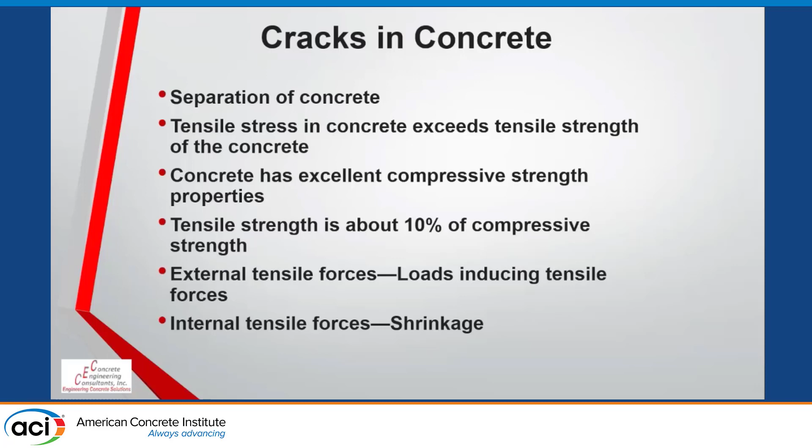I want to make sure I'm clear on this. You can have a concrete slab. You can have a concrete element that has no loading. You still can get cracks. There are lots of reasons for concrete to crack.

Next thing I want to talk about is cracks. These are all the descriptions we have of concrete cracks. Now, the one that I really like is that, typically, if you go to the crack, you can stick your hand down in the crack, not touch the side.

The other side of that is if you come on that same project and the engineer looks at it, and you can barely see it. You sit down and brush it off, take a little light. You know, these terms get kind of changed.

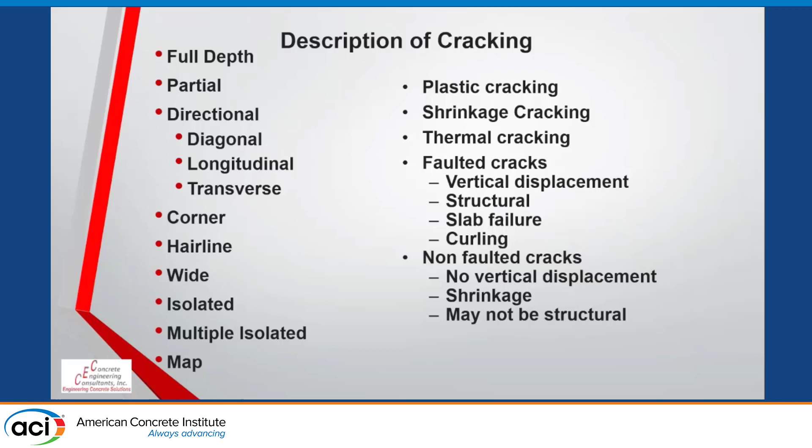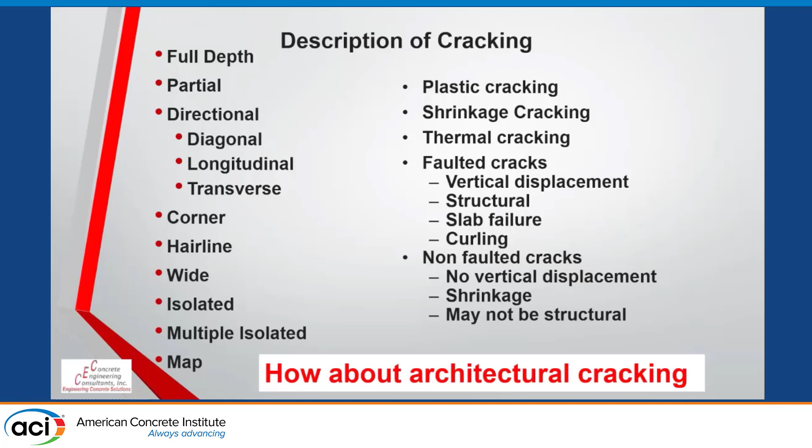But the thing I want to introduce you to is an architectural crack. The next time you go on a project and have a crack, and somebody's talking about it, what are you going to tell them? Hey, this is an architectural crack. It gives the structure some character. And if you look here, it looks perfect, but we did install several architectural cracks in the concrete so that we get the appropriate look.

These carry the loads and other things. You can use pre-stressed concrete. Okay, you can use pre-stressed concrete, but if you use pre-tensioned, pre-cast concrete, you can put those elements together. Many times, you let it crack where it needs to crack.

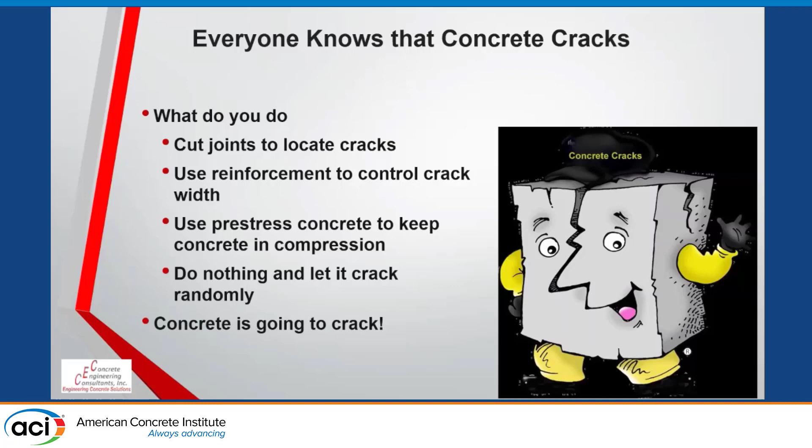Now, looking at design, managing cracks, looking at the construction process, I kind of look at this as a three-legged approach. Everybody's going to do their part. In practice, you need everybody doing their part. So the design is a big thing.

This slab on metal deck. I mean, it's a bit involved with slab on metal. How many people see a cracked slab on metal? Okay. I could never see that, but part of it, you need to look at what this is going to be. So you design this in accordance with the owner's desires and codes.

Should the engineer discuss cracks with the owner? Should he talk about the potential for cracks? Should he talk about the width of cracking, where they may be? And then you need to build that. The engineer's doing his job. That's the owner's expectations. He's designing the level of cracking. And then you need to build it.

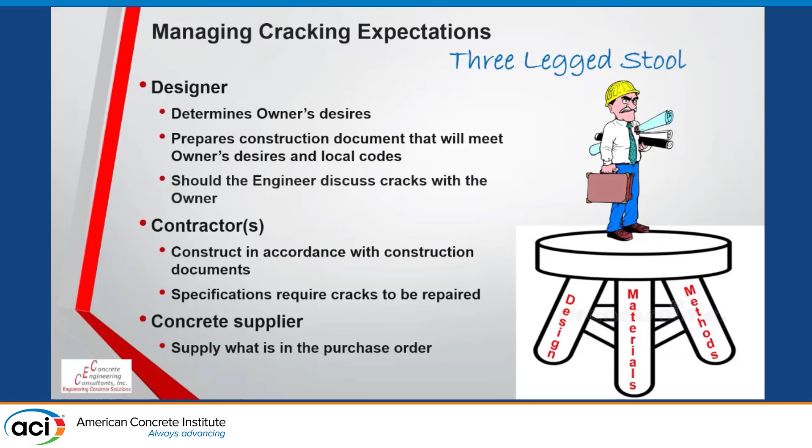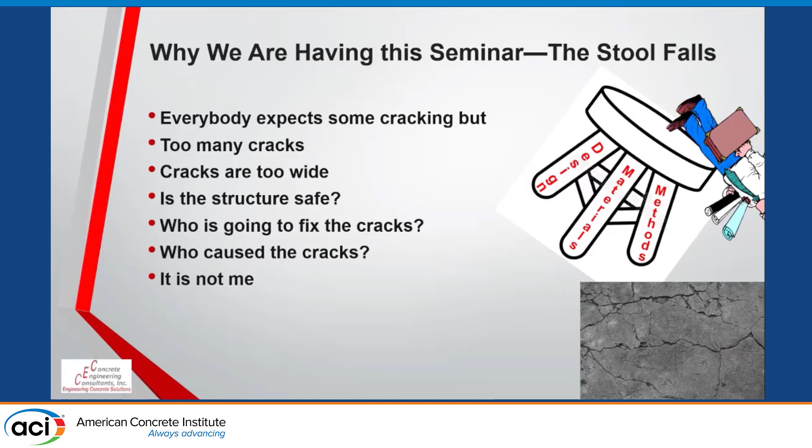And as a result, how they're going to fix it, who's going to fix it, when they're going to fix it, and where they're going to fix it. Now, the question is, concrete industry. Okay, we've already said this, we've got lots of people. We've got people that are involved in more than one thing. Correct? What's the definition of insanity? It's doing the same thing over and over and expecting different results. So if we understand concrete is going to crack,

Is that good? Wow. Whoa. I need to get away from this speaker. I'm not going to ask if you can hear me now, because I think if you're in the Aloft Hotel, you can probably hear me now.

Okay. So my question is, are we insane? Because we do multiple projects, we go through this same cracking battle time and time and time again. So typically what happens is that we finish the project, we get to a level, we have cracks, somebody doesn't like the cracks, somebody wants the cracks fixed, and we go through that over and over again.

Now let me preface this and say that I'm a consultant. Anybody know the definition of a consultant? A consultant is a person that comes to your job site, borrows your watch, tells you what time it is, and sends you a bill. Okay? Nobody lets me come to their job and borrow their watch for a great project. So if there's no problems, nobody's ever said, hey, Calvin, we want you to come and look at this. You know, this job came in under budget, below schedule. Everything is perfect with this. Nobody ever asked me to come out for those.

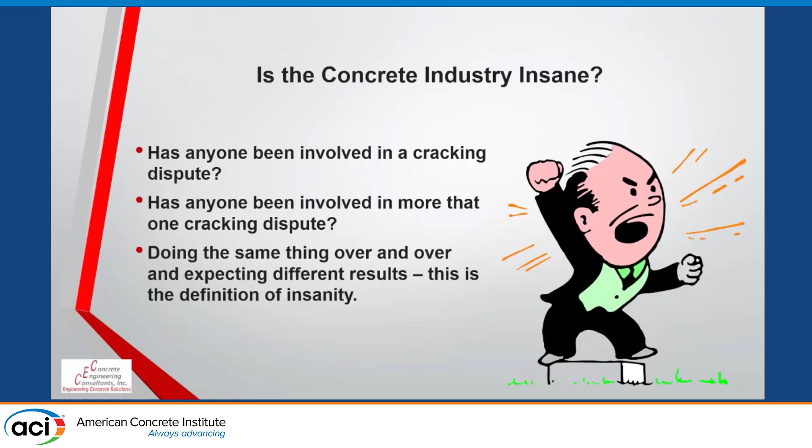I get to go to the ones where somebody is saying, I'm not happy because, and that because gets to be a lot of different things. So I probably have more of a skewed opinion than many people do, because most of the time when I'm coming out for cracking issues, the concrete's already cracked, and then there's issues about what are we going to do about it, whose fault is it, why did it occur, and those things. So I keep saying, I see this over and over again. We do the same thing over again as far as how we handle this.

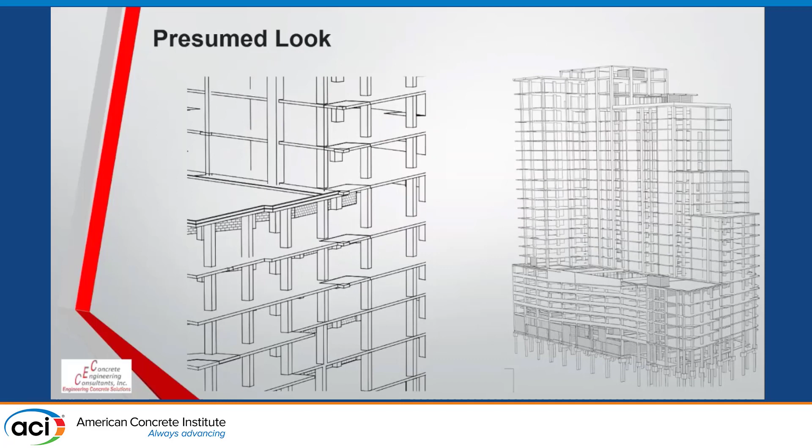This is this structure. This is what you're buying, Mr. Owner. And then we build it, and this is kind of what it looks like. So what we tell the owner and what we tell the expectations is this is what this is going to look like. But a lot of times, this is what it looks like. So here's my question. When we're presenting this, and we're talking to the owner, rather than give him this, why don't we give him this?

Okay. Why don't we say, those little lines there, oh yeah, they're cracks. Let's just assume for conversation's sake, this is designed in accordance with 318, and Frank here is going to tell you all about that in a few minutes. So, we're going to have some cracks located through this. What if we told the owner that this is kind of what you might be seeing?

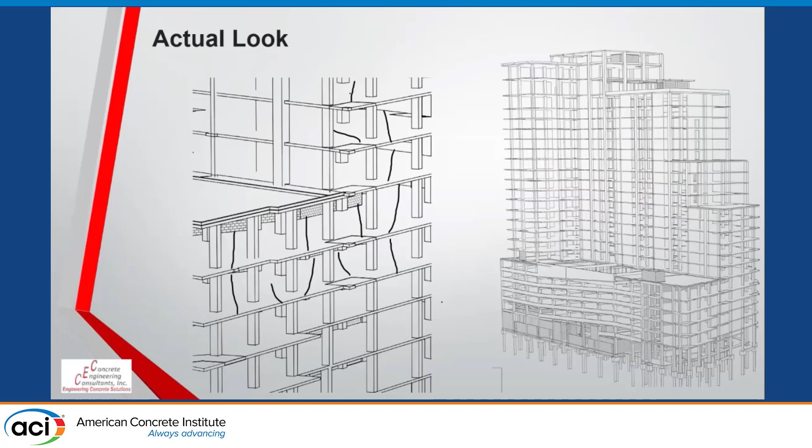That's true, but you will get this. Okay. You're exactly right. You will not get the job, or you may not get the job, but I tell you what it will do. It'll open up dialogue. Now, it might not end well, but it will open up dialogue. If you don't like cracks, you're probably not going to like cracks after they've been repaired. Because if you take a crack in reinforced concrete, structural reinforced concrete, many times it's a fine line.

Now, typically the way we like to repair cracks is we route it out and we put something in. Now, there's other ways, there's architectural ways, but those get very complex. So when you start routing out and you start putting materials in, it looks like this. And let me go back. Slab on metal deck. This is going to be reused as a showroom. Nobody is going to want that in their showroom. So, what's the solution to that?

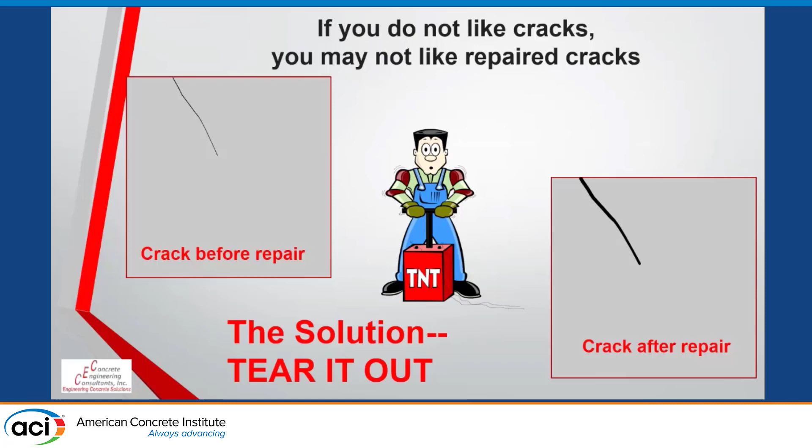Tear it out. Now, nobody's going to believe this, but I've been on projects before where you may tear out 10% of the concrete panels as a result of cracking. Okay? So, you've got cracking. Nobody wants it to look like it's repaired. This is a new building. The owner doesn't want that. And so you hear this, and then you'll hear, well, I didn't buy cracked concrete. All right. So let's get back to expectations.

Most of the time, we don't know what the owner's expectations are pertaining to cracking. We don't typically tell them it's going to crack. We don't review that reinforced concrete has this capability, and many times reinforced concrete will crack. And then we don't say, we can do some things to control cracking. We can do some things to minimize cracking. We can put additional reinforcing steel in it. We can use a concrete mixture that has different additives in it that will provide lower shrinkage. We can do things like this to limit the cracking.

And then the next thing we're going to have to tell him is it costs more. Okay? There is no free lunch in the concrete industry. So when you start adding reinforcing steel to control crack width just for the sake of that, when you start getting low shrinkage concrete mix, when you start putting additives in it, when you start using shrinkage compensating concrete, all of these things cost more. And it needs to be up to the owner whether he wants to pay for this.

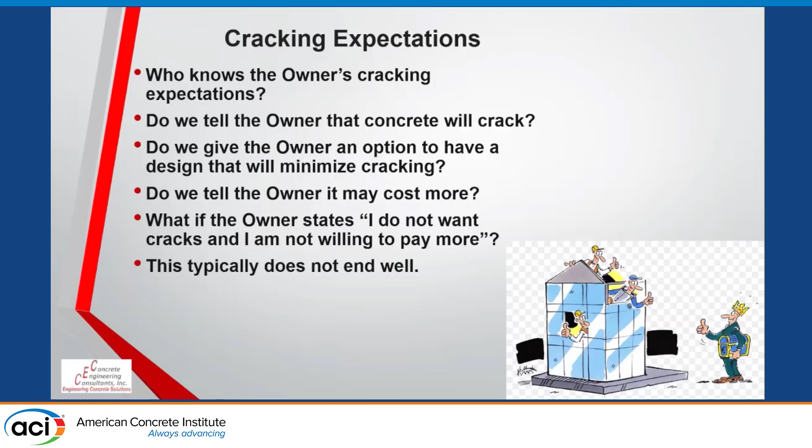Now, somebody mentioned a minute ago, if I showed that picture of the cracked slab, you're not going to get the job. Okay? That's a good point. But if the owner says, I don't want cracks, I'm not willing to pay for them, that typically doesn't end well at that point. So one of the things is what are the expectations? If the expectation is that you're not going to have cracked concrete, and you've got something in your project documents that you're going to repair cracks, you might be having a little bit of a problem. So cracking expectations get to be real important.

So what if the owner's not happy? He's not happy because of cracks. Now, let's drill down through that a little bit. So let's say I'm on a project and I've got an owner's rep on site. The owner's rep is looking at this. There are cracks there. Doesn't bother him. And then all of a sudden, out of the home office, the executive VP comes through. Those are what I call suits. Whatever their business is, it's probably not concrete construction. It is typically something else, and they're walking through this.

And they're walking through and they're looking down and they see all of these cracks. So then you've got somebody that's saying, I don't know why you accepted this, but this isn't going to happen. I'm not having this. This is cracked concrete. This is not what I want. So the owner is not happy. And then, anybody familiar with the golden rule? The golden rule is very simple. He who has the gold makes the rules. Who has the gold? The owner. Okay?

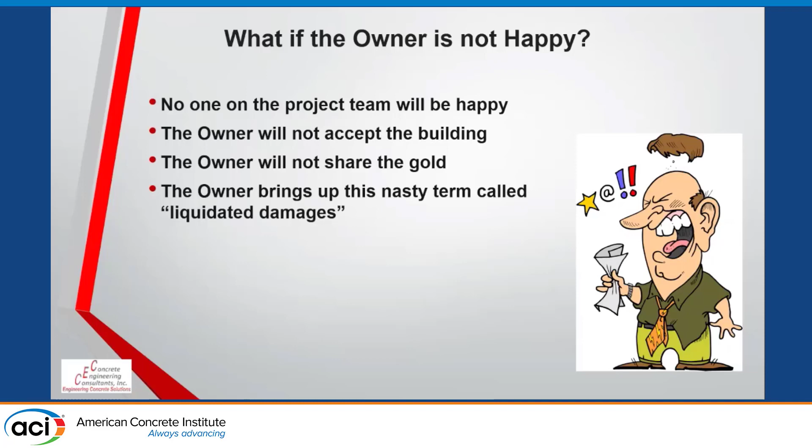So if the owner's not happy, he may not choose to share his gold. And then if we start talking about things, liquidated damages and things such as that kind of pop up as a result of that. So if the owner's not happy, then something needs to be done to make him happy. And a lot of times he's not looking at a technical exposition. He's not looking at anything.

Now the bottom line is nobody that I have ever met wants to tell the owner, hey, you got what you paid for. We designed this in accordance with the codes, local codes, applications. We constructed this in accordance with contract documents. We used the concrete mix, the materials, the reinforcing steel, post-tension, whatever it is. We did all of this stuff, and you've got cracks. Okay, nobody wants to tell the owner that. Nobody wants to tell the owner after the fact that, in essence, you kind of got what you paid for.

Okay, the owner's opinion. The owner thinks he should be happy. So the owner thinks that he should get a building that meets his desires, even though it meets project specifications. So if he doesn't like something, he or she thinks that they should get this, it should be made right, quote unquote.

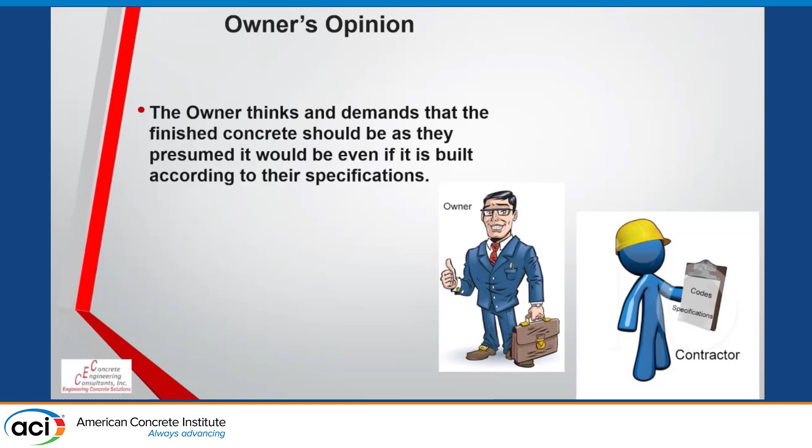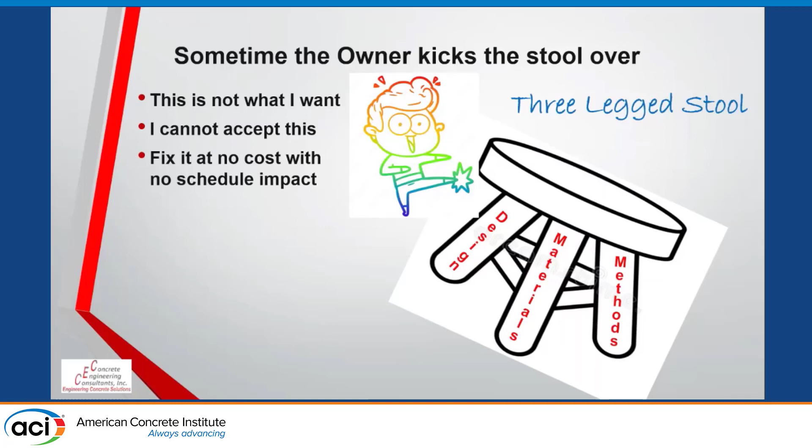Now, so the owner says, I cannot accept this. It's not what I want. It's not what I thought I had. You showed me that 3D BIM model. It didn't have cracks in it. So I want this fixed, and I want it fixed at no cost, no impact to schedule. Okay? The one thing that never changes on a project is the schedule never gets extended. If anything ever happens on the schedule, it shortens. I've never been on one that says, hey, take your time, get this done. So now the three-legged stool is kind of out of balance.

Anybody familiar with Costco? Costco is a big retailer. They got stores all over the country. Well, here's the thing about Costco. If I go buy something from Costco and I don't like it, I can take it back. You can go buy that lawnmower, run it for 3 or 4 years, and you can march that lawnmower right back in that store and they will give you a refund on it. So one of the mentalities we have in many cases is what I call the Costco mentality. The owner bought a building, he's not happy with the building, and he wants this to be made right so that it meets his total expectations. Structures and buildings typically aren't like that.

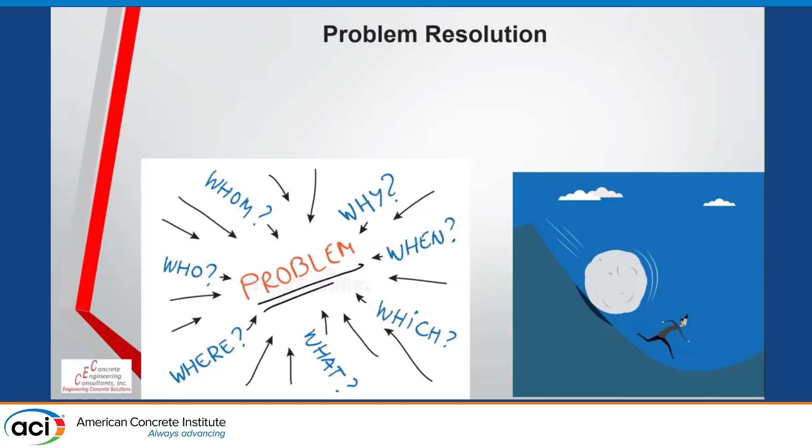Now we get to the cool part. Resolution. Problem resolution. So you got the problem. The most important thing to think about a problem is who pays, how do I get someone else to pay, and all problems roll downhill. So I'll give you an example. This is a bridge deck. Bridge deck, South Carolina, 3 pours. Got cracking in the pours. DOT said, too much cracking, don't want to pay for this, I want this fixed. So the general contractor fixes it.

Then he goes to the ready-mix guy and says, by the way, I had to spend a lot of money fixing cracks that were caused by you. Okay, then we get into this. Step right up. Front row seats are always available. So he says, I need to fix this because of problems caused by you. And so then we say, wait a minute now. This is a DOT job. The South Carolina DOT tells you what mix to use. They've got this table, and they tell you how much cement to put in it, minimum cement, aggregates, gradations, blends, all of that.

Then they have inspectors at the plant. Then you have this documentation you fill out. And you take the concrete to the project, and you have these people testing the concrete to determine if it's okay in the plastic state. Then you make test cylinders to determine if the concrete is okay in the hardened state. So you have all these inspections. So I'm trying to wrap my head around this. If you tell the concrete producer what he has to do, you give him the mix design, you watch him batch it, you do all of these different things.

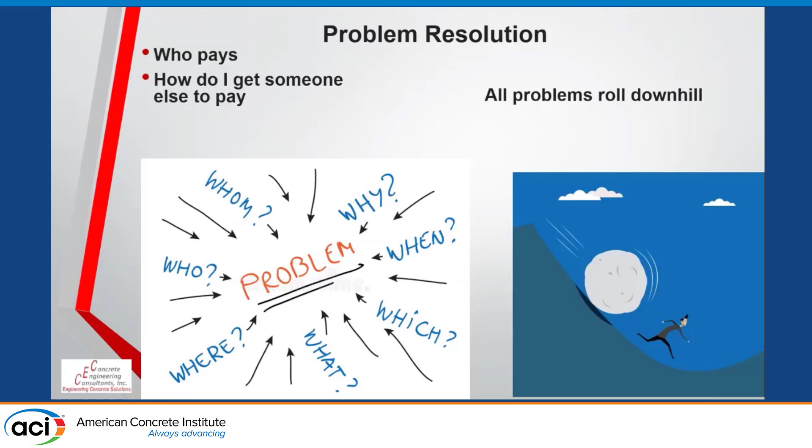It was not a fire drill. So, you know, if you go through all of those things, how can you tell him or her this is their problem? So anyway, then, how do you get somebody else to pay? So you see that in many different cases. So kind of looking at things as they progress.

The owner didn't buy cracked concrete. Not his intention. Never saw any cracks in any of the things that they were looking at. Cracks look bad. Everybody knows you can't have this many cracks. Now, how many designers do I have in the room? Oh man, we can really pick on y'all. There's not many of you.

Okay. How many designers design a crack-free concrete structure? How many? Okay. How many contractors, not counting you, Frank, how many contractors do any type of crack analysis? So, you know, you specify sometimes a shrinkage value. So you want concrete to have no shrinkage. And so do you put that shrinkage value in any type of model or anything that's going to predict crack width? I never have known anybody to.

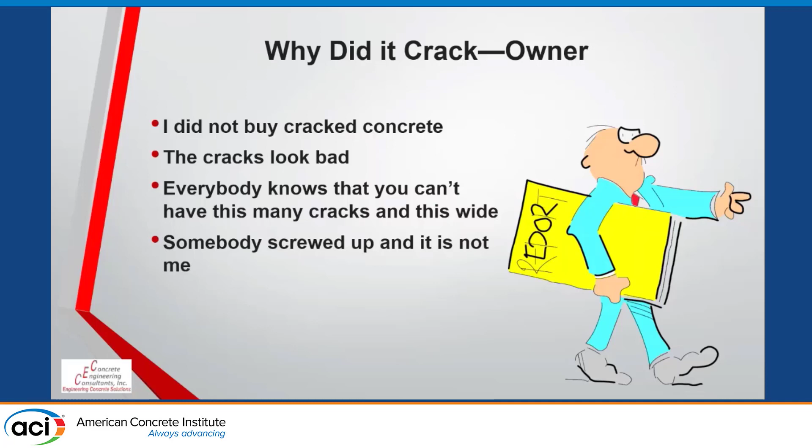I've asked this question lots of times: do you design things to be crack-free? Well, the owner's looking at this. Okay, I expect a few cracks, but I don't expect this many. And this many cracks may be 2. Okay. So, you know, somebody screwed up, and it's not me, and I want this fixed. And then you get into what I call problem resolution. So problem resolution is when you decide who gets to pay.

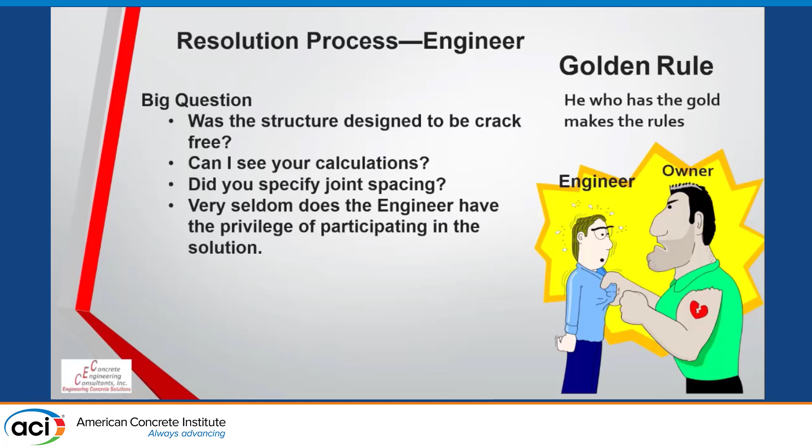So the first thing that happens is the owner chats with the engineer. So the golden rule is in effect. Was the structure designed to be crack-free? Can you show me your calculations that show that? How could you design this with this amount of cracking? Did you talk about joint spacing? Did you mandate anything? But very seldom do I see the engineer get the privilege of participating in the solution of repairing cracks. I've seen it a few times, but most of the time, it's assumed that it's got some level of cracking.

Then you get to the next level. Okay, the next level is the contractor. So the contractor and the owner have a dispute, and the contractor says, don't look at me. I followed the drawings and the specifications. Maybe. Again, how many contractors do I have? How many of you guys, ladies, have done a project and you have done everything in the specifications? You have abided by the specifications 100%. I don't see anybody raising their hand.

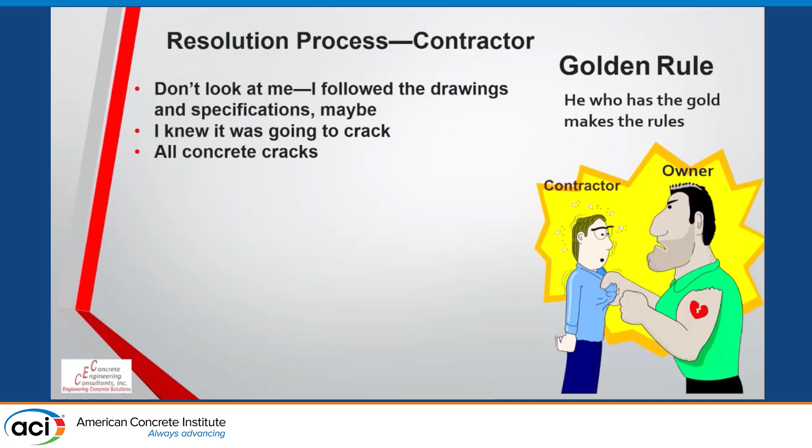I mean, and then you get into that nasty little thing. You've got this reference ACI 301 and all of these. Well, it's got a whole bunch of requirements. So that's where I kind of get into that maybe. And then the contractor, and it always amazes me how smart people get after something happens. So nobody talks about cracks in the beginning, but as cracks form, then the contractor says, hey, I knew it was going to crack. Every project I've done like this is going to crack. All concrete cracks.

And then the next thing the owner says is, I'm not going to pay you. You got this little cool thing called retainage. Okay. Any contractors have a problem getting their retainage? Let me reword that. Anybody not have problems getting their retainage? So, you got this. And the next thing he says is, hey, I'm getting ready to build 43 more buildings like this. I've got 6 more data centers scattered out across the U.S. If you don't kind of help me out on this, you're not going to do any of those, okay? So that's another part: no more projects for you. So now the contractor's kind of in a position that he needs to make the owner happy. And everybody typically does want to make the owner happy.

So then we get to the contractor and the subcontractor. And so you get kind of the same thing. Then the other one you get from the subcontractor: hey, I did what you told me to do. Now, I've seen a couple cases where that's a true statement. I've seen a couple cases where things get behind. The general contractor tells the concrete subcontractor, don't worry about it, you can pour on this muckety-muddy mess here and everything will be all right. And that typically doesn't end well either. But I did what you told me to do.

And then we get back into this. Well, all concrete cracks. We knew it was going to crack. We talked, everybody knows this. We've done 10 jobs and it cracks. And then you get into this: it's bad concrete. Blame the concrete supplier. Okay. How many ready-mix guys do I have here? Now, have you ever been sucked into a case where concrete cracked and it was your fault?

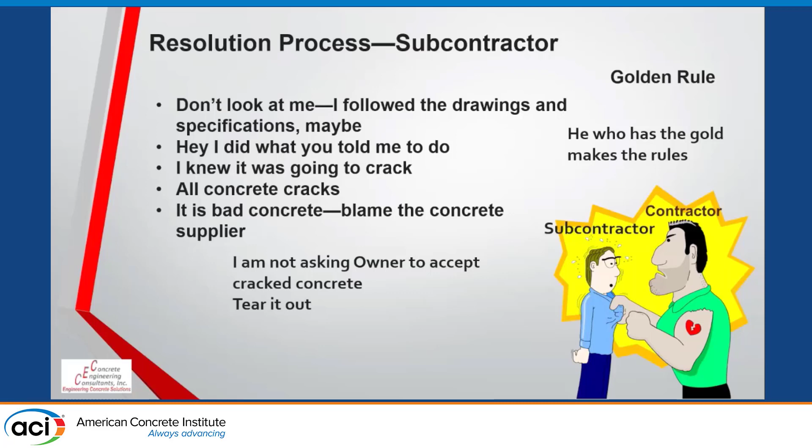So what's the option? Tear it out. So you tear it out. So you take it out, you put it back in. One of the things I always look for when we get to this point, if you put it back and you change the way you put it back, that's an indication that something was wrong initially or something that was wrong up front.

Okay, so the resolution process is the concrete supplier. I provided what was required. I brought you the concrete. I got it there on time. It met the plastic properties. You accepted it. You decided to place it. It met the concrete strength. It exceeded the concrete strength. Nobody requested low-shrinkage concrete. All you asked for was 4,000 psi concrete at 28 days. I gave you that. If you look at the compressive strength results, it's 6,000 psi concrete. So everything is good. I did what I wanted to do.

Nobody's willing to pay for low shrinkage concrete. I'm going to make concrete with the materials that I have that's close to me. So I happen to live in an area where I have poor quality aggregates. I have poor quality sand. To get workable concrete, I have to put a lot of water in it, or put a lot of admixtures in it, both of which can affect shrinkage and cracking. Okay? And the concrete was not cracked when it left the plant.

Okay? Now, I'm going to tell you something about the ready-mix guys. If you come to the second session, there's a guy by the name of Mike Wizenot from the concrete company. But I can tell you how the concrete guys can ship you concrete that will never crack. It's very simple. They leave out the cement. If you leave out the cement, you will not have cracks in concrete, because that nasty cement water paste, that's the thing that's doing the cracking. So if you leave that out, you don't need to attend the rest of this seminar.

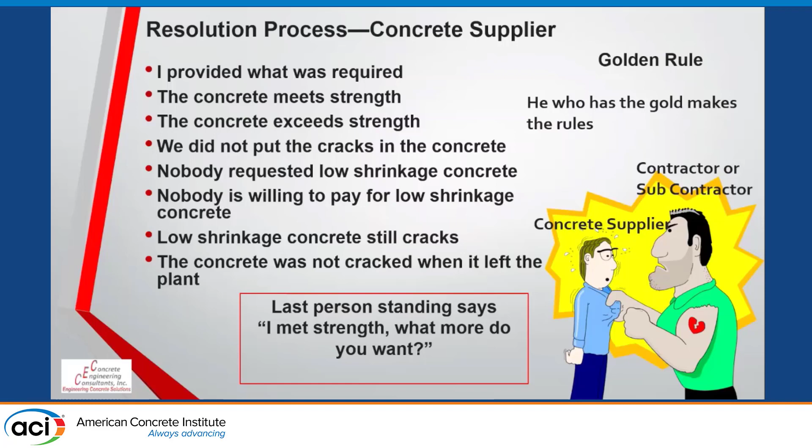So, possible solutions. One is educate the owner that most concrete structures are not crack-free. You will get some level of cracking. If you don't get the job, then at least it's on the table. And I'm not so sure if you've got an owner, you're doing a high-rise, and you're designing in accordance to 318, and you know you're going to have to fix all the cracks that occur, or something such as that. That may not be one you want, or you may want to have some extra dollars in there, or you may want to do it just for funsies. Okay?

Tell the owner what it's going to cost to manage cracking. If you don't like it, you don't like it in this area. Okay, this is what we can do. These are things we can do. These are options we can do. The operative word is minimize. You will never, ever eliminate cracking. You will minimize cracking. Supply materials that meet the design and expect some cracking. And it's really not a surprise to anybody that's been in the concrete business for more than 20 minutes, as we have proven as we started this seminar, that concrete is going to crack.

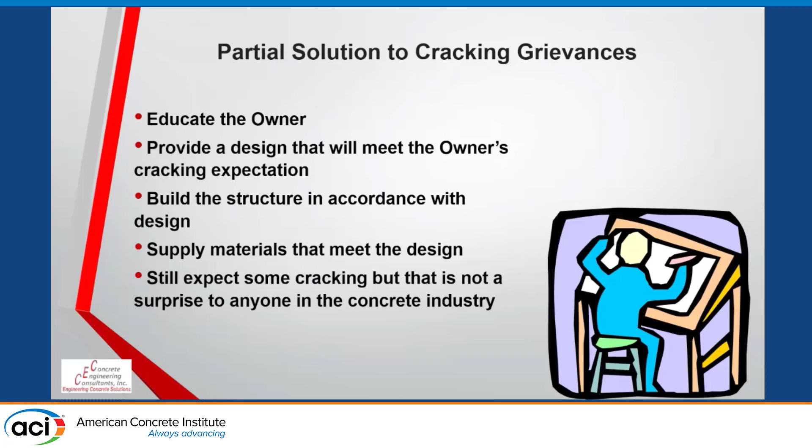So, in closing, may your cracks be architectural or invisible, and may the retainage be paid.